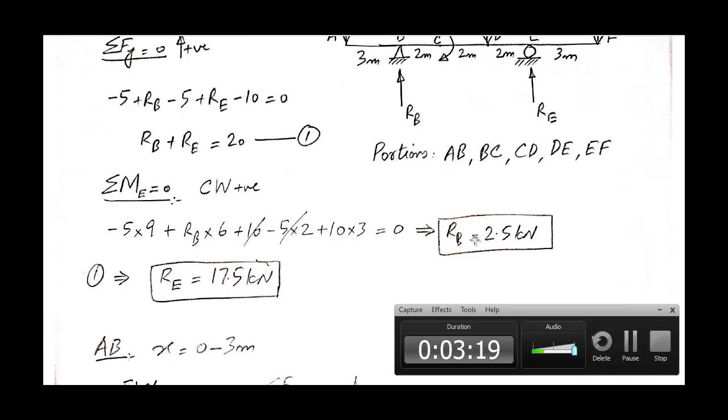Next step is to divide the beam into portions, and we know that we consider a separate portion whenever there is a change in loading or there is a change in the boundary condition or support of the beam. So we start from point A. At point B we have a hinge support and a reaction, so AB will be our first portion. Then B to C, at C we have a point moment, and then C to D, because at D we have a point load. Then from D to E, at point E we have a support, so this will be a dividing line between the portions, and then the last portion is portion EF.

So it means that for this beam we will have to consider 5 different portions: AB, BC, CD, DE and EF. Now let's consider these portions one by one.

So portion AB is from 0 to 3 meters, and here is the free body diagram of portion AB. This is the free end, point A section, and these are exposed forces, shear force in the downward direction and moment in counterclockwise direction. The X will start from the extreme left end.

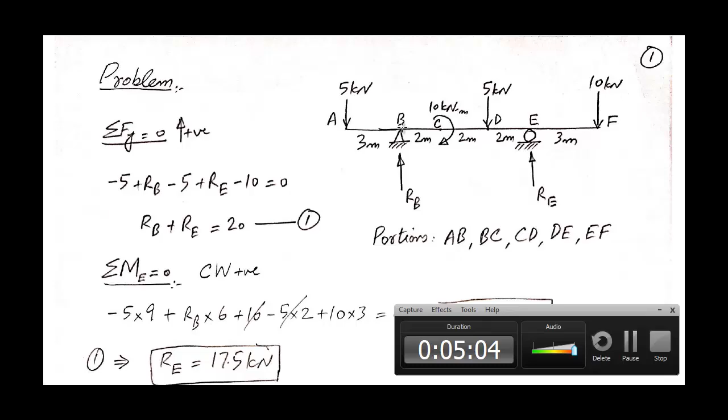One particular reason of selecting this problem for this week is that some students get confused when they see an overhang portion at the beginning, because they assume that the X should always start from a support. So I want to clarify that that's not the case. In our case, we will always consider x starting from the extreme left end, whether there is a support or not. So x is starting from this point.

Now we can simply apply the conditions of equilibrium to get the equations of shear and moment. Sigma Fy equal to 0 with upward forces as positive. 5 kilonewton force is acting in the downward direction, so minus 5, and V is also acting in the downward direction, so minus V, and this gives us V equal to minus 5 kilonewton. There is no x involved in this equation, which means that the value of shear is constant for the entire portion.

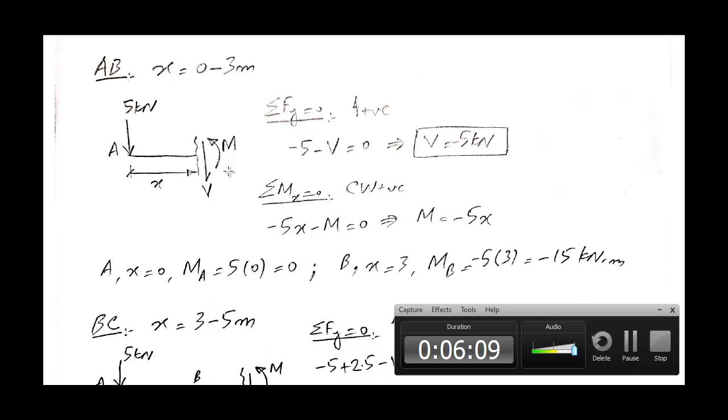Next is the equation of bending moment. For that we'll take sum of moment about the section, sigma Mx equal to 0, with clockwise moment taken as positive. The 5 kilonewton force will produce moment in counterclockwise direction about the section, so minus 5x, x is the lever arm, and this m is producing moment in counterclockwise direction, so minus m. If we rearrange this, we get m equal to minus 5x.

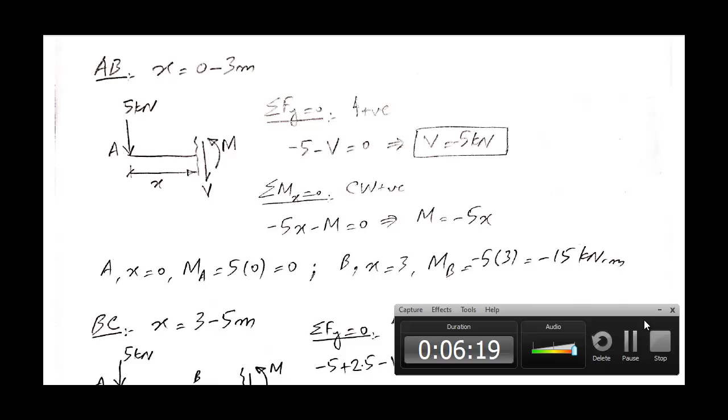X is present in this equation, which means that the value of the moment changes with the variation in x. So we will calculate the value of moment for point A and point B. At point A, x is 0, so MA comes out to be 0, and at point B, x is 3, and MB comes out to be minus 15 kilonewton meter.

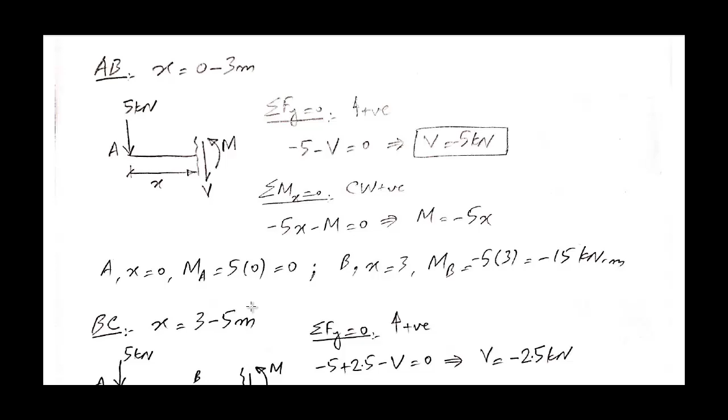Now we are getting 0 value of moment at point A. Is this logical? If you look at point A, it is a free end, and there is no point moment acting at this free end. We have discussed earlier that if we have a free end and there is no point moment acting at that free end, the bending moment will be equal to 0 at that free end. So the 0 value of bending moment at point A is logical.

Next portion is portion BC. The range of x for portion BC is 3 to 5 meters, starting from this point up to this point. This is the free body diagram of the entire left side of the beam. We have a hinge support here, point load 5 kilonewton acting in downward direction at point A, and we have a support reaction of 2.5 kilonewton at point B. This distance AB is 3 meters, and we have exposed shear and bending moment.

Let's apply the conditions of equilibrium. Sigma Fy equal to 0 first. 5 kilonewton is acting in the downward direction, so minus 5 plus 2.5 in the upward direction, and then minus V. If we rearrange this, we get V is equal to minus 2.5 kilonewton.

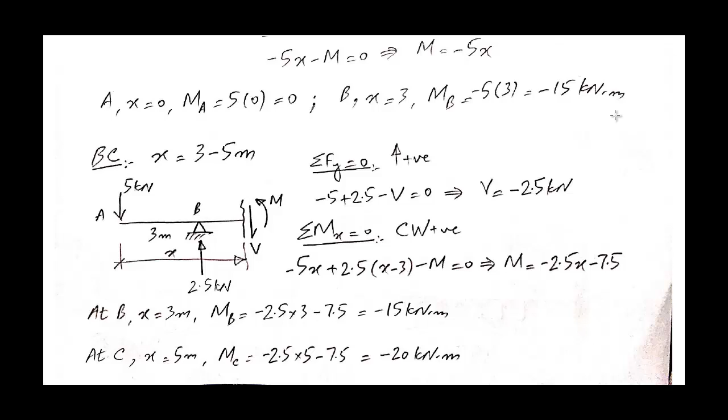How much was the value of bending moment for point B from point A side, from portion AB? If you look at the value of MB from portion AB, it is minus 15 kilonewton meter, and from portion BC, again we are getting the same value, minus 15 kilonewton meter. So it means that our calculations are correct.

There is another point to note here: although we have a hinge support and there is no external moment acting at the hinge support, still we have some value of bending moment at this hinge support. The statement that at a hinge support, if there is no externally applied moment, the value of bending moment will always be equal to 0 - that is true for an end hinge and end roller support. Now this hinge is not an end hinge anymore because we have an overhang present on the left side of the hinge support. That is why, even though there is no externally applied moment at this point, still we have some value of bending moment at this support.

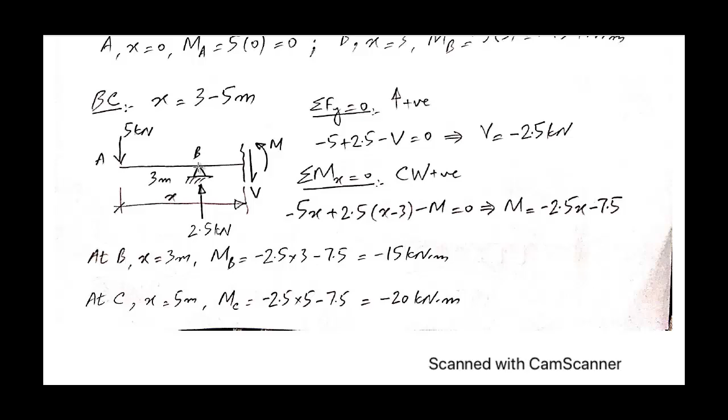Next is portion CD. This is the free body diagram for portion CD. We have points A, B and C present on the left side of the section, and this time this moment is also included. We have the reaction of 2.5 kilonewton acting here. We have exposed shear and bending moment. The range of X is from 5 meters to 7 meters. Let's apply the conditions of equilibrium.

Sigma Fy equal to 0 first. So 5 kilonewton force is acting in the downward direction, positive 2.5 kilonewton is acting in the upward direction, minus V is acting in the downward direction. This completes the equation for shear, and if we rearrange the equation we get V is equal to minus 2.5 kilonewton. Next, the equation of moment, sigma Mx equal to 0.

Starting from this side, 5 kilonewton force is producing moment in counterclockwise direction about the section, minus 5x. Then this 2.5 kilonewton force is producing clockwise moment, so plus 2.5 into x minus 3. X is this entire distance and this 3 meter is this distance, so the distance between the load and the section is x minus 3. Then we have this 10 kilonewton meter couple acting in clockwise direction, and as it is a moment, we do not need to multiply it with any lever arm, and since it's acting in clockwise direction, it should be taken as positive. Lastly, minus M, that is this exposed moment.

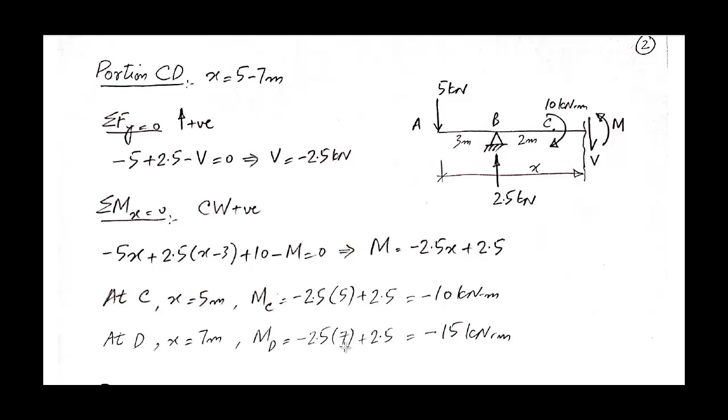Okay, so now let's move to the next portion, portion DE. Here is the free body diagram of the entire left part of the beam from the section that has been cut through portion DE. The value of x ranges from 7 to 9 meters.

If we apply sigma Fy equal to 0, we have 5 kilonewton load acting downward plus 2.5 kilonewton force acting upward minus 5 kilonewton, minus V, the exposed shear, equal to 0. Rearranging, we get V equal to minus 7.5 kilonewton.

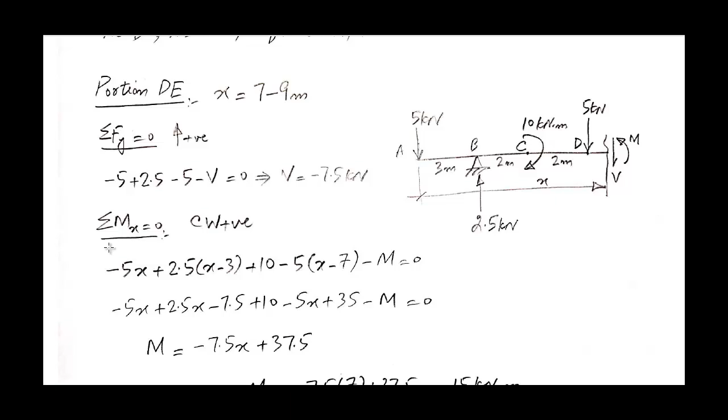Then the equation of moment, sigma Mx equal to 0, with clockwise moment taken as positive: 5 into x producing moment in counterclockwise direction, so minus 5 into x. Then this 2.5 kilonewton force producing moment in clockwise direction, 2.5 into x minus 3. Then the 10 kilonewton moment acting in clockwise direction, so plus 10, and minus 5 into x minus 7.

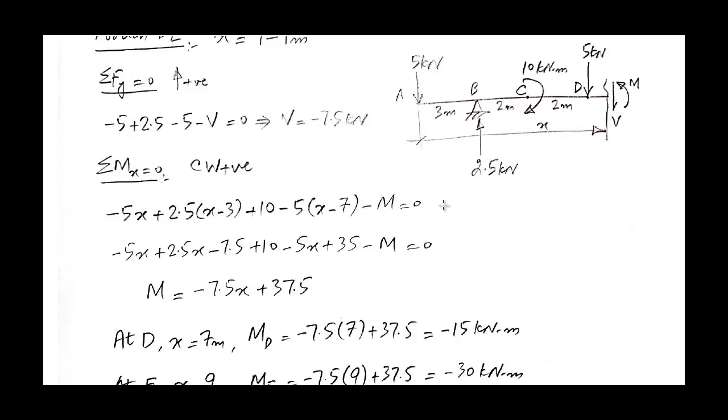7 is the distance between point A and the 5 kilonewton load, so x minus 7 is the distance between the point load and the section. So 5 into x minus 7 minus m equal to 0. Rearranging, we get m equal to minus 7.5x plus 37.5, with x present in this equation. This means the value of moment varies as the distance from the section changes.

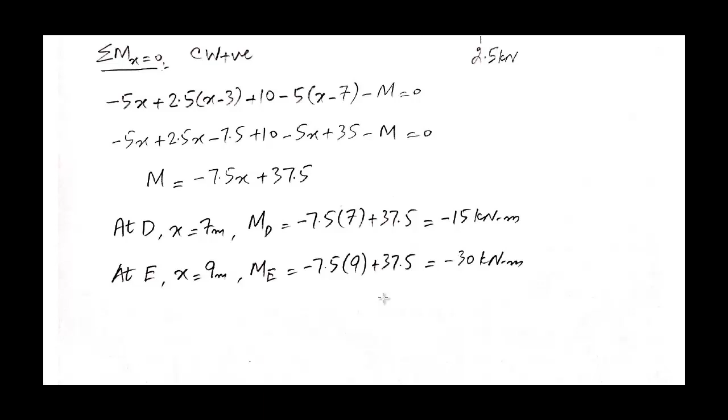So for point D and E, when we plug in the value of x, we get the value of MD and ME. MD comes out to be minus 15 kilonewton meter and ME comes out to be minus 30 kilonewton meter. Now let's move to the last portion, portion EF.

For portion EF, x ranges from 9 to 12 meters, and this is the free body diagram of the entire left side of the beam when we cut a section through portion EF. Exposed shear and bending moments have been marked, and this time both reactions are present in the free body diagram.

So if we apply sigma Fy equal to 0, we get minus 5 plus 2.5 minus 5 acting downward plus 17.5 and minus V, equal to 0. So V comes out to be 10 kilonewton in this case.

And then for sigma Mx equal to 0, taking clockwise moment as positive: 5x with the negative sign is the moment due to this force because it produces moment in counterclockwise direction. 2.5 into x minus 3, where x minus 3 is the distance between the 2.5 kilonewton force and the section, then plus 10 because it is clockwise, then minus 5 into x minus 7 is the moment of the 5 kilonewton force, then plus 17.5 into x minus 9 is the moment of this force, then minus m.

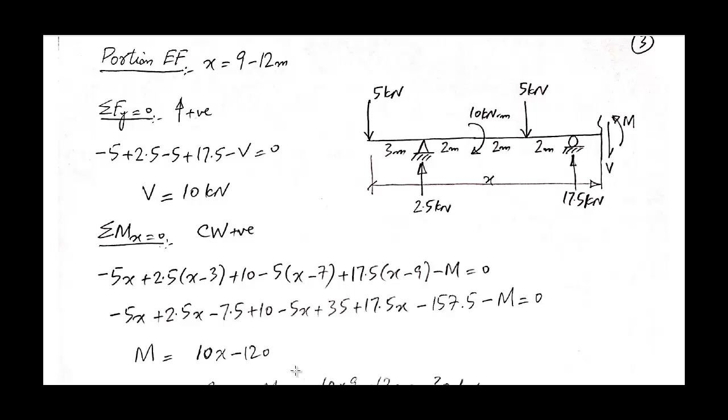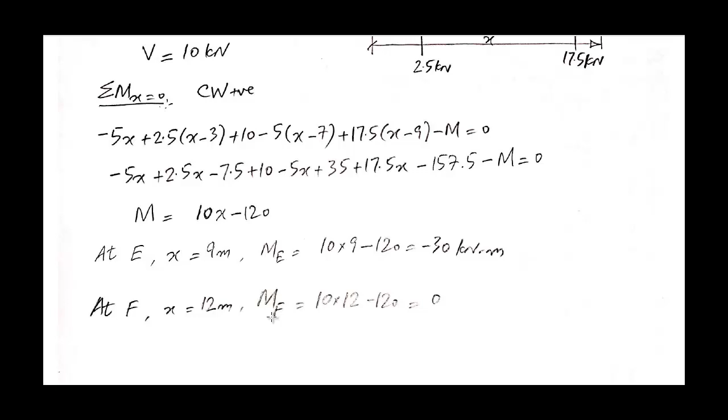If we rearrange this equation, we get m equal to 10x minus 120. For points E and F, if we plug in x as 9 meter and 12 meter respectively, we get the values of ME and MF. ME comes out to be minus 30 kilonewton meter.

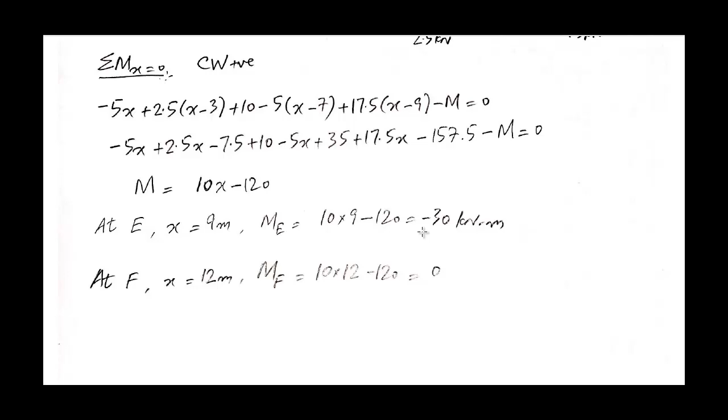If we compare this ME with the previously calculated ME, it's the same, minus 30 kilonewton meter. And for MF, it's equal to 0. At point F, this is a free end and there is no externally applied moment acting at point F, so the moment at F should be equal to 0, and we are getting it as 0.

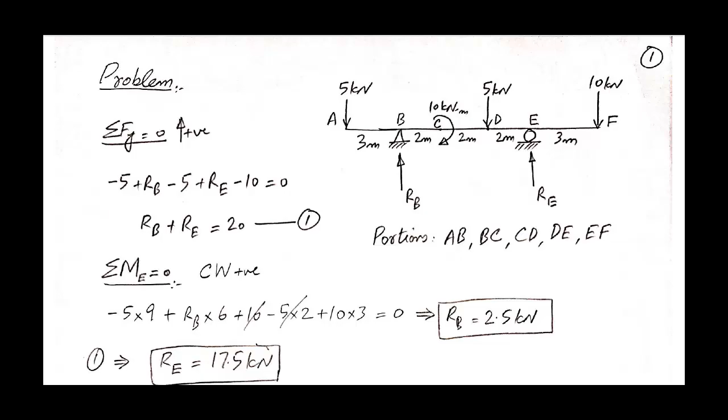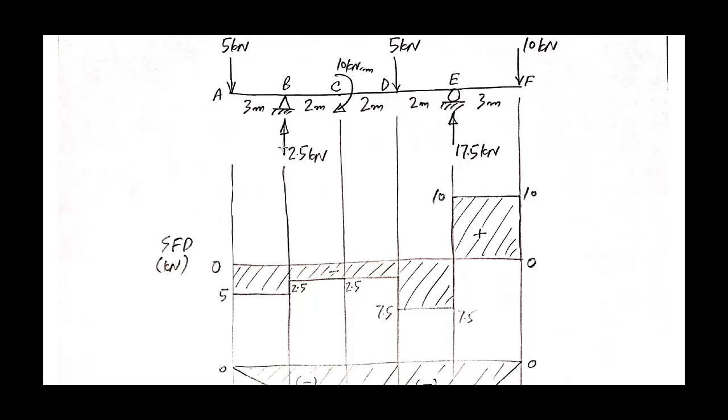So that seems correct. Now the last stage is to draw the shear force diagram, bending moment diagram, and elastic curve. For that, we will consider the beam once again. So I have drawn the beam here, and wherever we expect a change, we will draw a guideline at that point. So draw the beam and then draw the guidelines.

Plotting the shear force diagram and bending moment diagram is merely plotting the values we have already calculated. Both diagrams are not very complicated in this case because we have just point loads and point moments. There is no UDL or VDL, so there was no question of convex up or concave up. Just plot these values and you will get the shear force diagram and bending moment diagram.

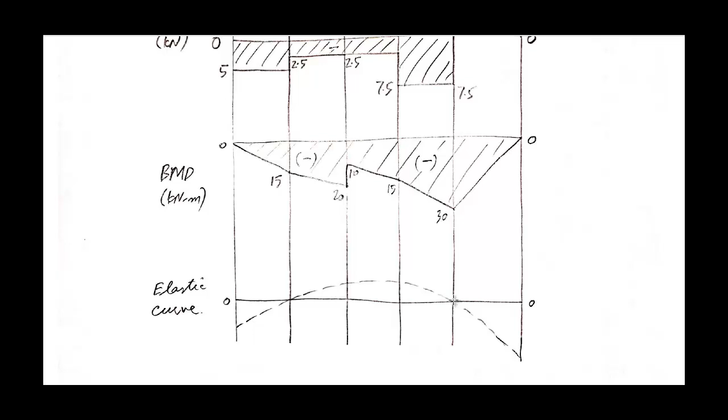If you notice, the entire bending moment diagram for this case is negative, which means the entire beam will hog. So I have drawn an elastic curve that is hogging, and one thing to keep in mind is that the elastic curve must always pass through the support. So we have a support here and here, and the elastic curve passes through these points. This completes our discussion about this problem.